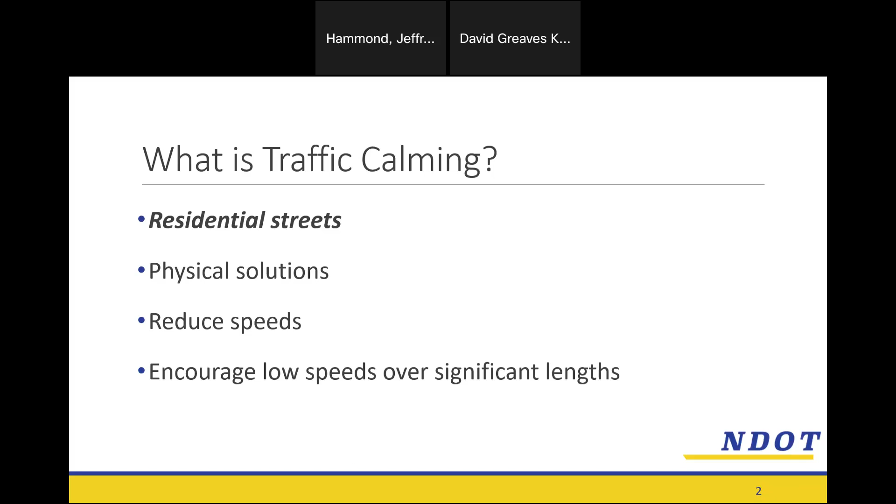Mostly speed and crashes, mostly. It was really a balanced one. I was looking back and made a few notes here.

One is the pedestrian destinations category, because you've got Coleman Park and a couple of other destinations nearby. You were really proud, you were ranked 202, so that's good news.

You really didn't have a lot, but it was really well balanced. You had a good mix, maybe true too. So anyway, that's what puts you in the program.

Regardless, you're here, and I don't want to give any indication this is not funded or anything. This is set - depending on the results of the ballot, we'll move forward with the project.

Of course, that's the entire length of Harlin. I know Harlin kind of turns the corner and becomes Drake essentially. That only becomes important when we start talking about the ballot - we'll talk about that in just a second.

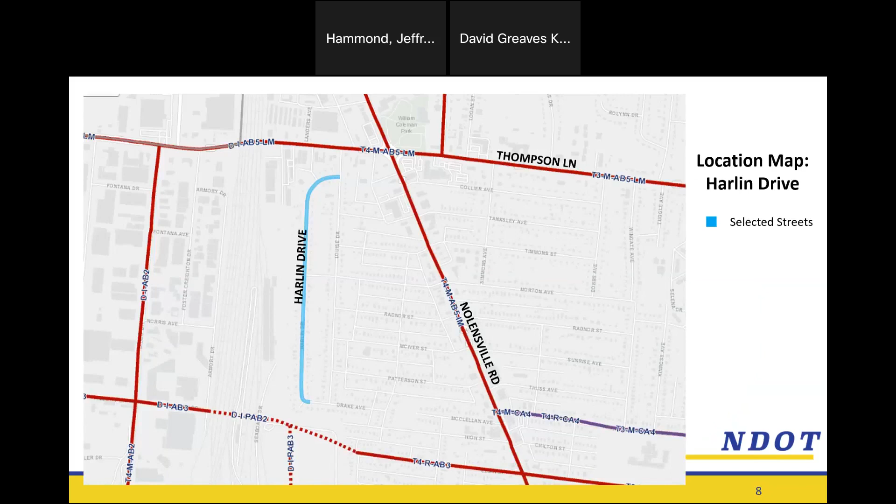Your neighborhood is the little blue line here, and then we just like to show some of the other streets in the area. But this is the map that is really new since we met last time.

And so you see a couple of neighbors - Collier was this time as well, so we'll be meeting with them later this week.

Over here is how you get to it. If you just go to Metro's traffic calming website and scroll down, one of the options is the traffic calming tracker, and that brings up that interactive map. You can look at all of Davidson County through that - it's really a nice tool.

Just a little bit about progress and the process. We're here at meeting 2. A few months ago, we were back at meeting 1. It looked like we only moved over 2 circles, but that is kind of a big jump, and we're getting into the home stretch.

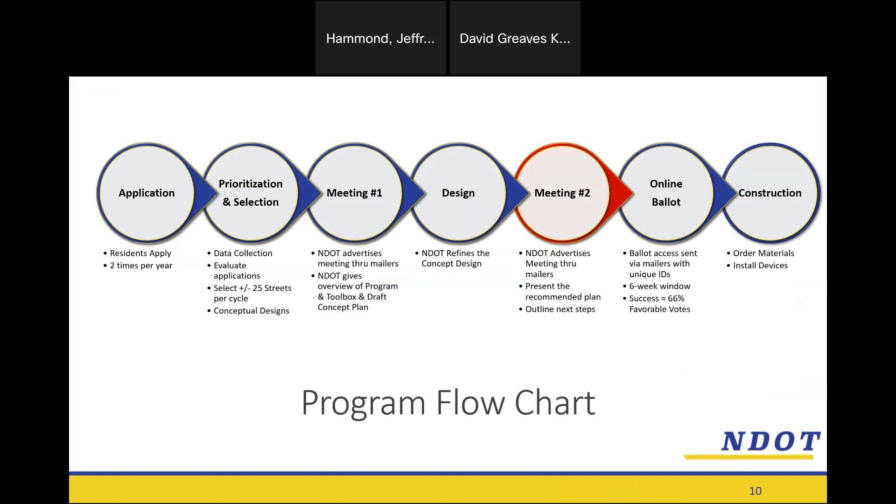Now it's the last time people move to the plan, and it hasn't changed substantially from what you saw 2 months ago. We're still a traffic calming based, or speed cushion based, traffic plan.

Again, all of these are the same projects. We'll be using the same cushion configuration - 2 cushions, both of them 7 feet in length, 6 feet wide, 3 inches high. It'll look very similar to what's over there.

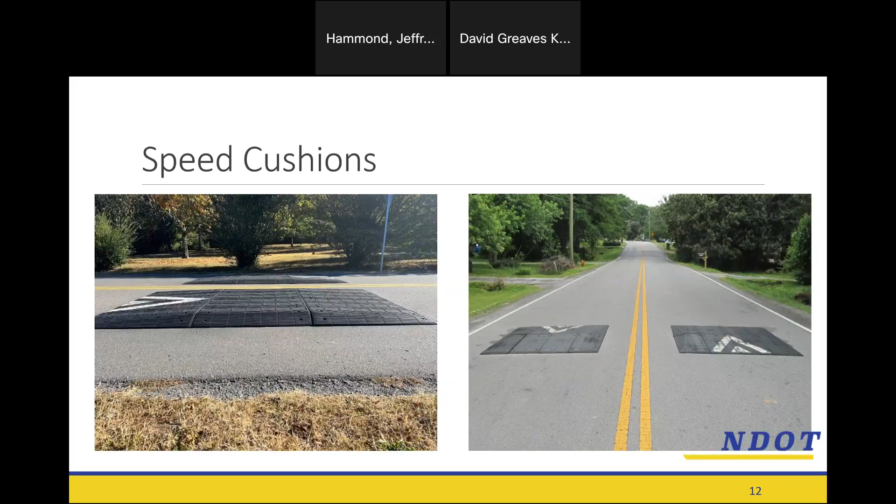One difference, and these next few slides are the actual design plans that we have for the street - one difference that is not going to be apparent on these is that we will be striping, or we propose to stripe, the edge lines on the street. Right now there is no striping. What that will do - we'll skip ahead a few slides - right now it's a 22-foot wide street from one edge of the pavement to the other.

What we would propose doing is coming back 1 foot and striping the edge lines. That'll give you something really useful. It's not going to make you feel better if you're walking, and it's not that big, but it does visually narrow the street, so it'll feel a little different.

That 20-foot width is still perfectly fine. A lot of you probably won't notice the difference. If we had put the stripe right on the edge, from a safety standpoint, hopefully there's a bit of visual narrowing, but a lot of our urban streets, especially, are 20 feet wide.

Let me go back. So what we're looking at here is the overall plan. This is the 90-degree turn down at Drake, and then this is where we are. There was some comment about the curve.

We've added some warning signs into this plan. Those might be handled in advance and separately, just through NDOT's typical traffic engineering process. So the meat of this is really the striping and then 5 sets of speed cushions over the length of the street.

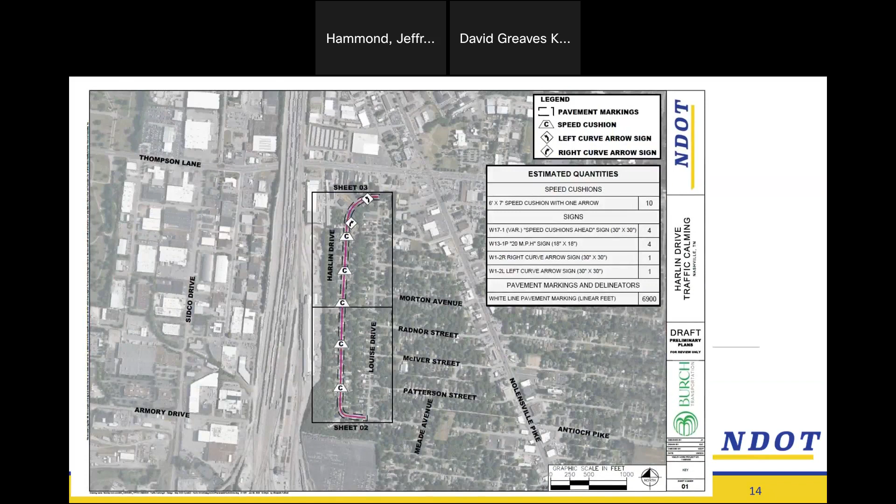That's really amazing, that's the whole idea. Yeah, well, I think you will see some benefit with it the way it is, especially if there's any traffic coming from this way. That's why I was asking which direction. I agree, I would expect most of it's coming from this direction.

In the distance here, before you get to that curve, I don't think there's a speed cushion that would fit in there and probably work. There may be some things like rumble strips you can put that just bring some awareness to it. Aside from that, it's going to be more signage and things like that. We could put an advisory speed on these curve signs.

Sure, sure. Rather put it ahead in advance. Plan, try to set this expectation.

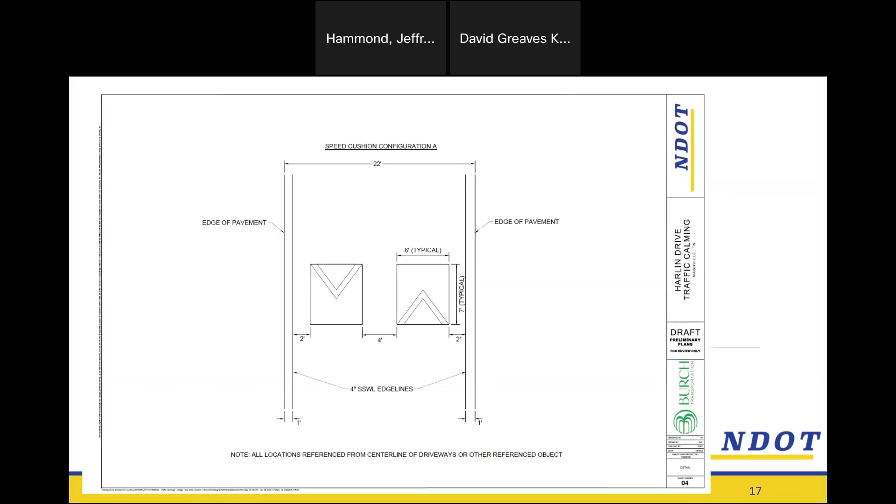The thing that's keeping us from putting that in - I don't know, but the reason we didn't put one in now was because of the curve. We don't want it right in front of our entrance, there is no driveway there, so I think the only reason we did it is because of the curve. But we don't want a car to hit one of these while the wheels turn.

It kind of does better just to be with the drive. Paint - sometimes they do that, yeah. The painted-on strip, they'll pick more for like where there's a point hazard coming up on the crosswalk here or something - we might do that rumble strip.

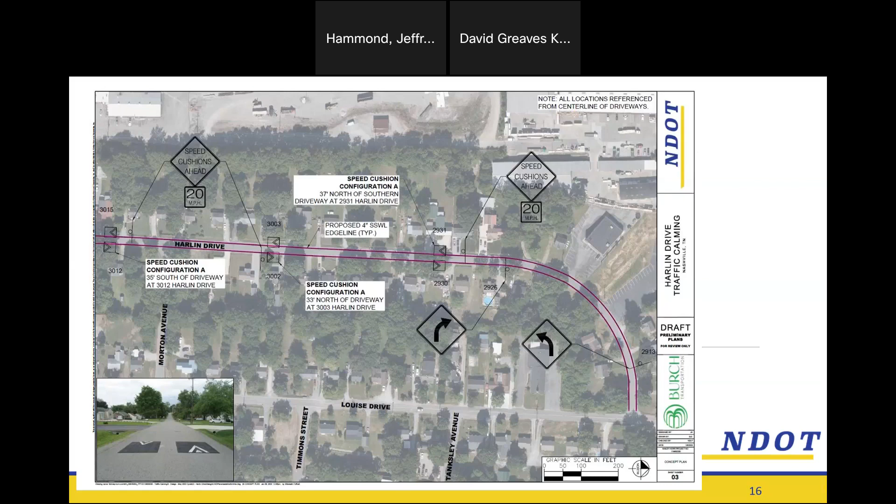Or against, and I think that's it. You know, we will vote. I mentioned a minute ago the line between Drake and Harlin - we're just going to take addresses. At some point, the address becomes Drake, and we won't ballot that person, we'll consider that to be the end of the street. So we just ballot from the limits of the project, those people that have a property line that is adjacent to the right of way of that street.

So we're not getting any side streets, we don't get any cul-de-sacs. If it was a rental property that...

No, not quite - good point though, I'm glad you brought that up. We send it to the owner, so we would send it to the landlord, not like you live in that house, but it would be sent to - that's right. Yeah, and even if the landlord lived in Florida, we send it to Tampa, Florida.

Tenants won't see a card at that residence, so it's one vote per owner, one vote per property. We send it to the name on the deed, the name at the property assessor's office. If there are two names on the property, we send one card to that household. You all fight over it, flip a coin, whatever you want to do, but you only get one vote.

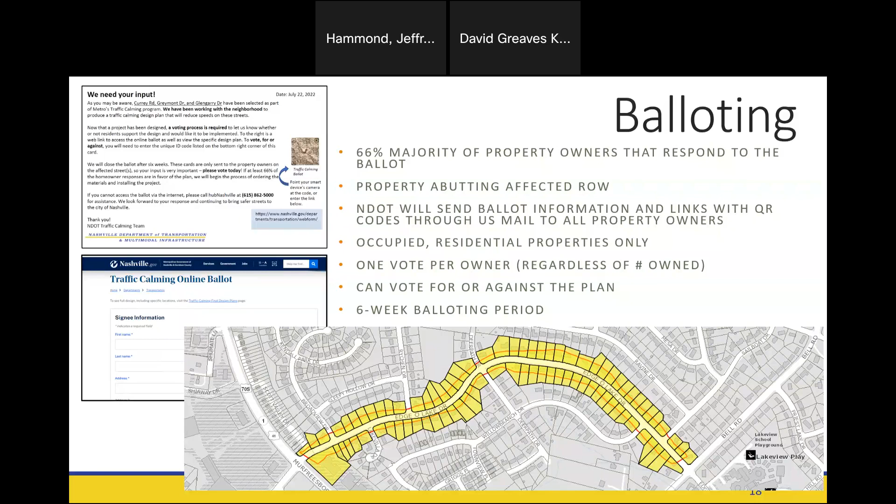Any kind of institutional use like this, we don't send ballots. It kind of begs the question too with Walker. If by the time we send the ballots, Walker has bought these and their name is not registered, we won't ballot them, even if it looks like a building—we look at the use according to planning. Now if Walker is still renting the property to a tenant, we would ballot Walker. Or we do our best, that's all I can say.

So a little bit about some time frames. That first one may be subject to what we can come up with in the plan, but typically give us 2 or 3 more weeks and we will post and send these ballot cards out to you, and then that opens up that 6-week time frame for the voting period.

Once that comes in, assuming it passes, we order the materials after that. Metro doesn't have a big warehouse full of traffic calming rubber—that'd be nice, it would speed things up—but we don't order materials until after the results of the ballot are in. So that's about another 2 months, and then just getting it on the schedule for our contractor to install is about another 2 months. So we're looking at late summer, early fall before we would be doing any of it.

So just to give you some time reference there, don't be expecting this week. There's just a lot of other projects all within this kind of time frame, all over the place. So, any other questions? Gripes?